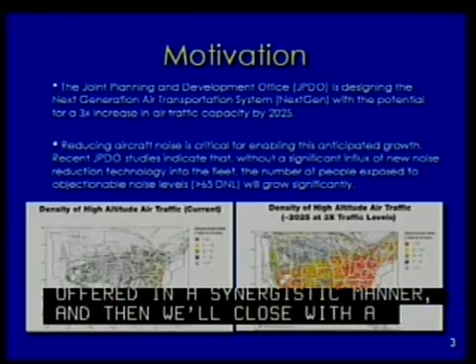In the way of motivation, as you well know, JPDO is charged with designing the next generation air transportation system, NextGen, and one of its goals is the potential to increase the capacity of air traffic by threefold. Clearly, an important enabling technology for that is reducing aircraft noise to enable this growth. Without it, JPDO studies indicate that the number of people exposed to objectionable noise in and around airports will steadily increase. The graphic is just a visual representation of aerial traffic density. On the left is the current picture, on the right is if we have the 3 times growth. All of these planes in the air must take off from an airport near you and land at an airport near you.

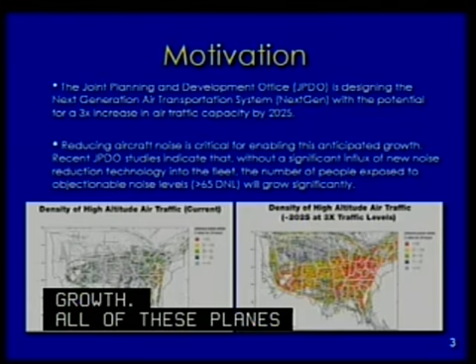So you see that noise is going to be a critical issue. Before going on, because we'll often be talking about noise levels in dBs, we thought it might be important to discuss what we mean.

Because there is some subjectivity in noise, very well-defined metrics have been identified and enforced that define the effect of the noise on the community. They take into account the spectral content, the annoyance rating, duration, and this aggregate metric is called EPNDB, Effective Perceived Noise Level, dB. For the purposes of community noise regulation, there are well-defined so-called certification points that any commercial aircraft flying must meet in order to be certified.

And these are so-called approach for landing, takeoff/cutback, and sideline. There are precise trajectories, distances, and durations for these that every aircraft must follow, and the noise is measured, expressed in dB. The chart in the bottom, concentrate on the blue bars. Those are really representations of what would be measured at each of the 3 points: approach, cutback, and sideline.

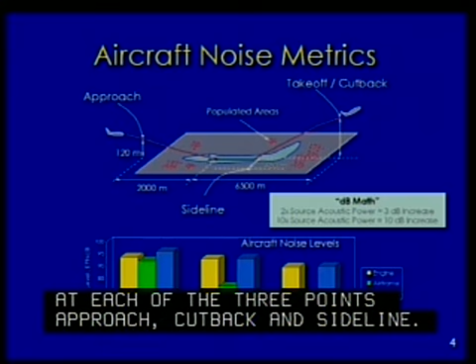In the subsequent charts, we'll often talk about cumulative margins, or margins more specifically. What we mean by that is for every class of aircraft, there are FAA rules, actually ICAO rules, International Civil Aviation Organization rules, that set limits on the noise that a given aircraft can make. The margins are what the measured level of that particular aircraft is at each cert point, subtracted from the noise regulation level.

Generally you want to be below that, so that's typically a positive number. And then you do that for all 3 certification points. You can express that as a cumulative metric - often that's what is done. But sometimes for the purposes of identifying trends, you could also look at an average. And both the sum and the average are straightforward arithmetic sums of the dB levels.

An important thing to remember about dB is that it's a logarithmic scale, which means if you double the acoustic power, double the number of engines, the noise will go up by 3 dB. If you want it to go up by 10 dB, you need 10 times the power. So clearly, to make dramatic changes, you need to do a lot, and the reverse is true also - to reduce significantly the noise, you need to do a lot of work.

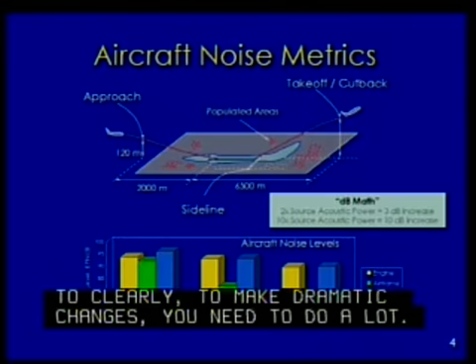Clearly, significant progress has been made over the years, and airplanes are much quieter than 20 years ago. But also it's clear that the trend is leveling off. And why is that?

One main problem is that it is a very complicated problem. Individual sources are highly complicated, involving interactions of flow with every part of the aircraft that makes noise. And then the complicated interactions that the sources could have - the engine slung under the wing, radiating, is affected, the jet plume is affected by the wing downwash. The noise radiated from the engine scatters off of the fuselage, so it is a complicated problem.

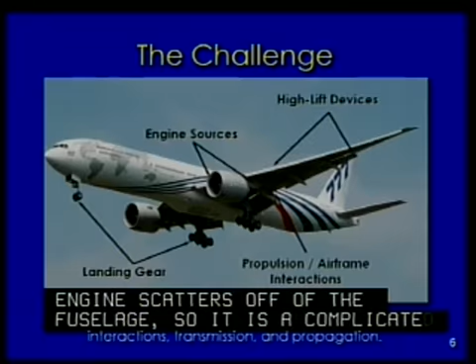And so it's a worthy challenge to rise up to. I think the caption in the bottom really captures it: the aircraft noise is a complex amalgam of sources, integration, interactions, transmission, and propagation.

Against this background of where we are, the challenges we're facing, the Subsonic Fixed Wing project, part of the 4 fundamental aero programs, has set itself goals to enable the JPDO vision. And there are goals in noise, in emissions, and in performance.

And we have identified two generations of aircraft. If today's aircraft are labeled generation N, then N+1 is the next generation, still a tube and wing, would look like a, say, 737, but more advanced. And then the follow-up generation, N+2, is something that would probably be radically different.

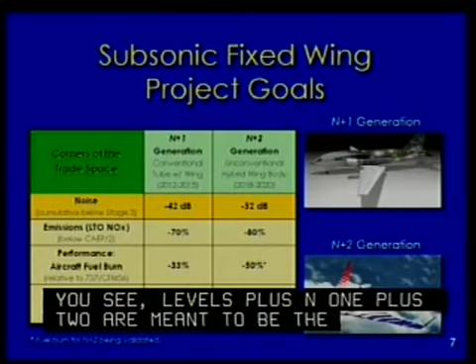I'm not going to talk about all the goals of the Subsonic Fixed Wing project, we'll just concentrate on the noise. The point to make is that the levels, the targets you see, whether for N+1 or N+2, are meant to be the corners of the trade space. If you were to optimize an aircraft just for noise, have acceptable performance elsewhere but really targeted at noise, those are the targets we think are achievable with the technology already in the pipeline and what is over the horizon. These are cumulative margins relative to stage 3.

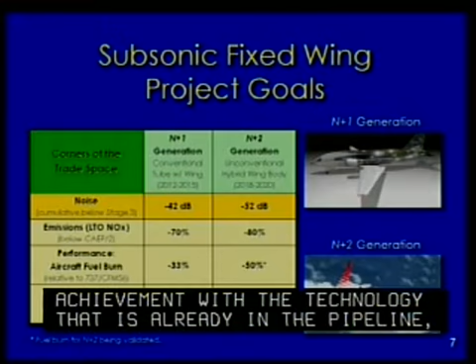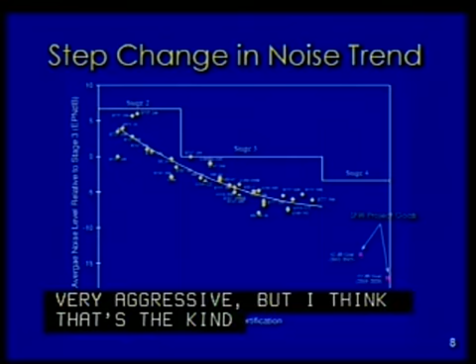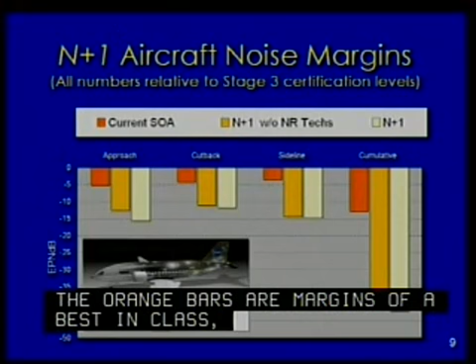A little bit more detail. This is an in-house NASA study. The orange bars are margins of a best-in-class single-aisle aircraft, something like a 737 - in fact, this one is an A320. It shows where it is today relative to stage 3 on a cumulative basis. The light yellow bars all the way to the right are our vision of the replacement for the 737 or A320, bringing the best of the technologies available today or in the pipeline. And you see that it's a significant change.

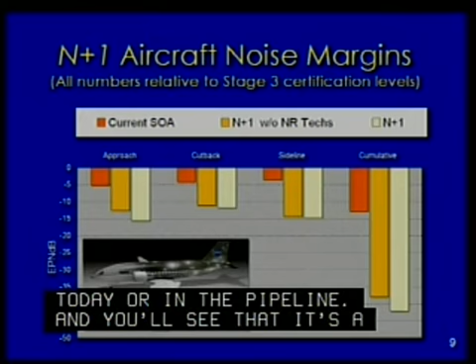Technologies having to do with better airframe design, so-called ultra-high bypass ratio cycle engines, and some additional airframe and engine noise reduction technologies. Together, the so-called N+1 achieves the 42 dB goal. In fact, the goal was set on the basis of this study.

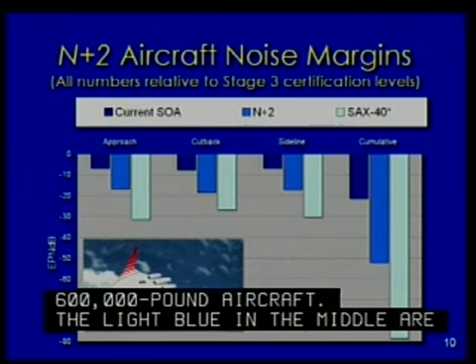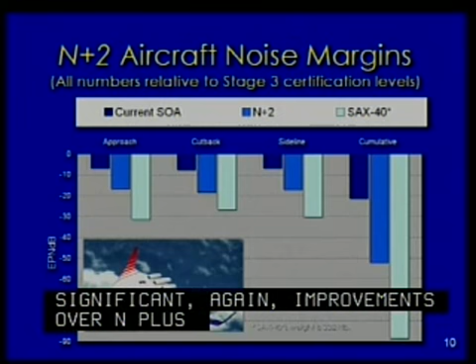Somewhat more nebulous is the N+2 design study. The dark blue, the current state of the art, is a 777, a 600,000-pound aircraft. The light blue in the middle is our vision of a so-called hybrid wing aircraft that would have significant improvements over N+1, cumulatively about 52 dB. We'll talk about the hybrid wing in great detail later, but principally it's the way the propulsion system and airframe are integrated, and the significant shielding you get from that integration buys you the benefits.

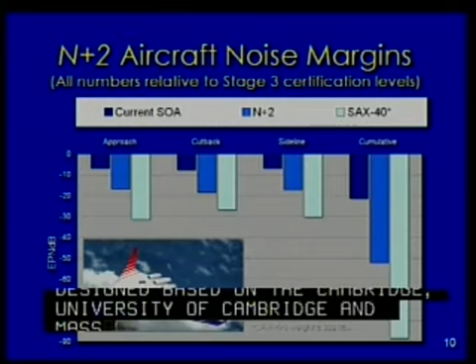For comparison's sake, we've also plotted the SAX-40. That was the design developed based on the University of Cambridge and Massachusetts Institute of Technology's consortium over the course of 3 years - what they called a functionally silent aircraft that would be blending with the background noise. So it was highly optimized for noise, and there were tremendous technical challenges that had to be overcome. They were way down there at about 86 dB cumulative. They had a much longer time horizon than what we are proposing to do, so we are naturally a little bit more conservative, and hence the goal is at 52.

Our research plan is really kind of a common template between all fundamental aero programs, perhaps the entire aeronautics program. It's a layered approach that starts at the basis with the fundamentals, really understanding the physics of the problem and addressing the issues one has, whether it's prediction, mitigation, or diagnostics. Then build technologies and tools at the discipline level, in this case acoustics, that address those needs, and push that up to the next level, integrate with multiple disciplines, and validate primarily the prediction tools we are developing, but also technologies, ultimately leading to a multidisciplinary analysis and optimization. The knowledge and capabilities flow up, the requirements and needs flow down, and ideally this is a continuous loop so things improve constantly.

The research effort is too big for just one entity. In-house, we do what NASA does best - fundamental, leading edge research - but we also work with industry and academic partners to bring in talents and capabilities we may not have in-house. So we have NRA-funded research, primarily with universities but also with some industry, and we also develop partnership opportunities with industry and other government organizations. While NASA in-house research is really at all layers, the NRA-funded research tends to be at the fundamental and discipline level, although it can creep up to the next layer. The cooperative agreements are primarily at the multidisciplinary and system level approaches.

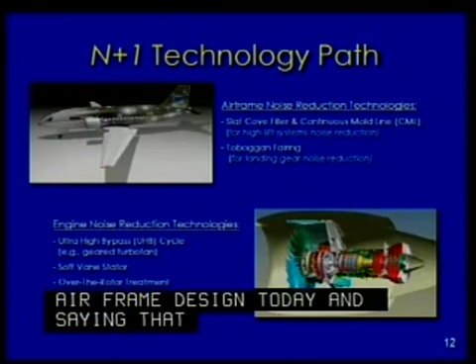Okay, we talked about the goals, 42 dB relative to stage 3. Here's the technology path: basically taking the best airframe design today, probably a 777 with the best high lift system, and scaling that down to the 737 class, assuming you can maintain the noise benefits of that.

Add some technologies, some of which we'll talk about, to further mitigate noise from the high lift system, from the slats, from the flaps, and from the landing gear. Then mate that with a new propulsion cycle—well, not new, but one that has been waiting in the wings, and I think it finally has its time in the spotlight. That's the ultra high bypass engine.

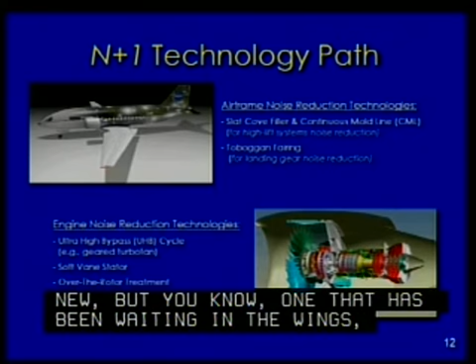Basically, you slow down the fan tip speed. This way, you reduce fan noise. You also reduce jet exhaust velocities, a notoriously difficult problem to mitigate. So you get significant benefits from the cycle alone.

But for insurance purposes, we also add some fan noise reduction technologies, specifically in this case soft vane stators and over-the-rotor. We'll talk about the soft vane stators later. Both of those technologies, in fact, have NASA patents pending on them. So this is our technology path for N+1.

Next slide, please. We have formed partnerships in the past, and we are continuing to develop partnerships now with industry partners who can help us push the front along on these technologies.

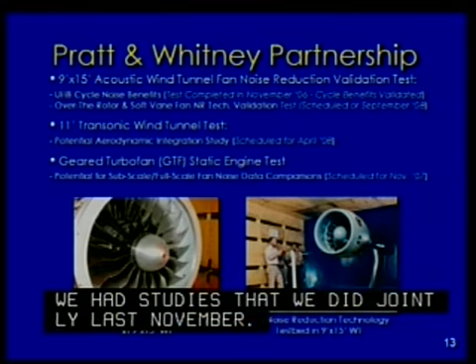Specifically on the propulsion side with the ultra-high bypass, we had studies that we did jointly with Pratt & Whitney. Last November, we tested a scale model cycle of their version of a UHB, which is called the geared turbofan. It was tested at subscale, in fact 22-inch scale, in a wind tunnel, and basically demonstrated the noise reduction benefits of that cycle. We are planning next September to do the test of the over-the-rotor and the soft vane technologies.

That will buy us the extra margin we want to have with the fan noise reduction. There's potential now to work with Pratt & Whitney, still in negotiations with them, to do some integration studies in the wind tunnel. They are also planning, they have on schedule, in fact, to do a ground test of the fan system for the geared turbofan. So there may be an opportunity for us to work with them and compare the scale model noise data with the full scale to see if that connectivity is there the way we think it is.

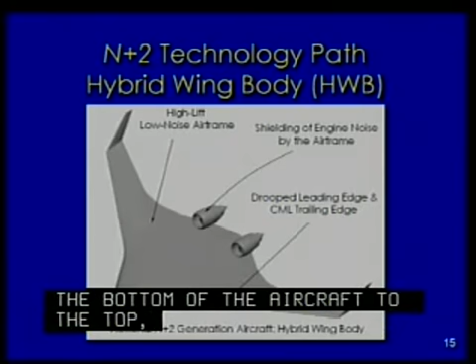Most dramatically, you see the engines can now be moved from the bottom of the aircraft to the top. This introduces the potential for shielding of propulsion noise sources. So clearly, with the engines in the location that they're at now in this graphic, you see the potential for large shielding of the forward radiated propulsion noise sources.

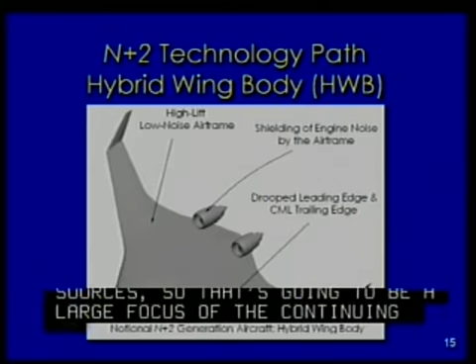It'll be a challenge to obtain shielding of the aft radiated sources, and so that is going to be a large focus of continuing work. It also changes the way the aircraft flies and the way the high lift system is integrated into the aircraft because of the blended wing body shape.

There's that blending of the airframe components as well.

We've just concluded round 2 of the subsonic fixed-wing NRA process, and I'll discuss several of the awards there that are very important in the acoustics area and directly related to this N+2 technology path.

The first award, just completed negotiation and awarded three weeks ago, is led by Boeing Phantom Works. They have MIT and University of California, Irvine as subcontractors. We're beginning to integrate a large team from NASA in the acoustics disciplines, the aerodynamics disciplines, and the system analysis and design optimization discipline as well.

The Boeing team was able to take advantage of that same Cambridge MIT Institute work that was done on the Silent Aircraft Initiative over a period of 3 years, and they'll start with these two aircraft concepts that are shown.

On the left, you see the SAX-40 design with the higher risk, higher payoff technologies that included embedding the engines in the airframe. On the right, you see a lower risk, but still a dramatic step change in technology and noise reduction potential—it's the podded version of this aircraft.

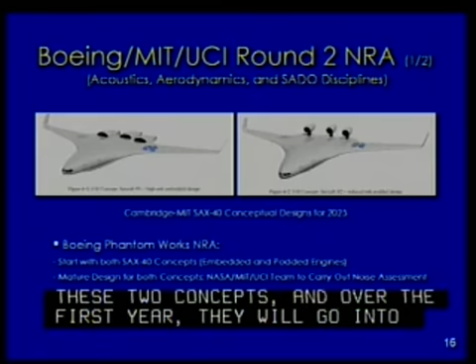The Boeing team will start with these two concepts, and over the first year they will go into much greater detail of the design, closing out the aircraft design in one year. They will look at technology suites to add to these aircraft, and by the end of the first year, working together with NASA, they will plan in year 2 and year 3 a large-scale, high-fidelity wind tunnel test.

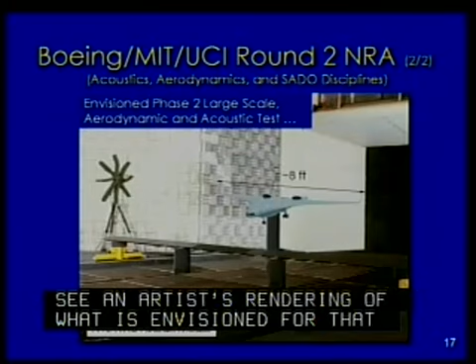If we go to the next chart, we see an artist rendering of what is envisioned for that phase 2 large-scale, high-fidelity wind tunnel test for both aerodynamic and acoustic characteristics of this type of aircraft. We see the 14 by 22 wind tunnel with this concept ready for testing, with far-field microphones deploying the latest phased array technology to image the acoustic sources.

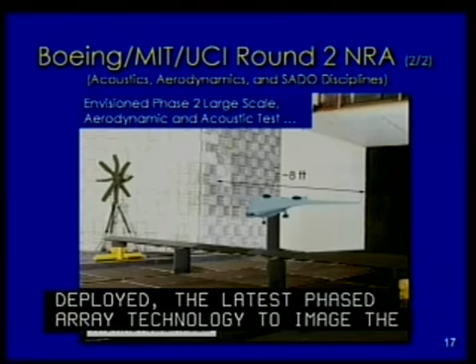This is going to be a big challenge. As we bring the airframe noise sources down and the engine noise sources down, it's going to take a greater resolution of measurement technology to properly characterize these. This is envisioned for phase 2, occurring in 2010 if we proceed to that stage.

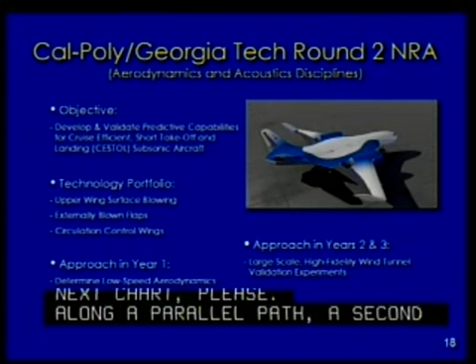Along a parallel path, a second team led by California Polytechnic with Georgia Tech as subcontractors are also proceeding, focusing on that metric listed in the subsonic fixed-wing goals for field length, going after the cruise-efficient, short takeoff and landing subsonic aircraft concept. You see, again, a rendering of that type of concept.

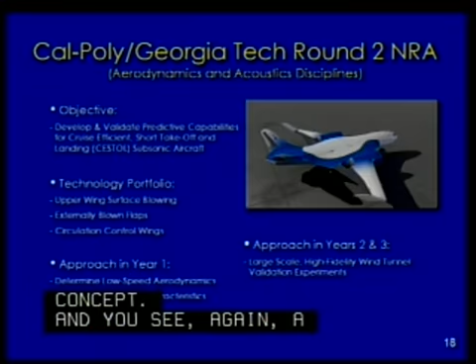They'll look at the technology portfolio, including upper surface blowing, externally blown flaps, and circulation control wings that enable this short field takeoff. In year 1, they'll be putting together the tool set to design and optimize this type of configuration. A key is going to be how they integrate and predict the acoustic characteristics of these technologies integrated into a complete aircraft concept.

Then, like the Boeing-led concept, in year 2 and 3 they'll be putting together plans to do a large-scale, high-fidelity wind tunnel test of this type of concept. In this case, they're aiming towards the National Full-Scale Aerodynamic Complex at the NASA Ames site.

Next chart, please. A different set of concepts were awarded in round 2. Whereas the first two focused on the complete aircraft concept and technology, these are going to focus more on individual technologies which we think are very promising and can really change the way aircraft are designed and flown and impact the acoustic characteristics.

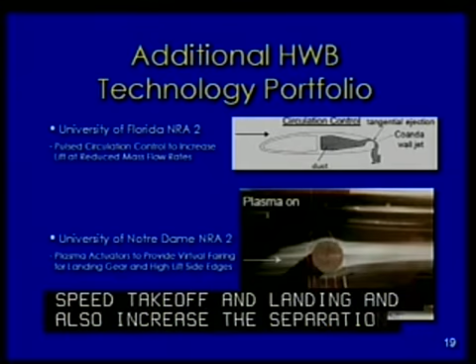The first is at University of Florida, focusing on circulation control. This technology can dramatically increase lift coefficient and therefore enable lower speed takeoff and landing, and also increase the separation between the aircraft and the community below, changing the airframe sources as a result.

In particular, they're going to be looking at pulsed or unsteady circulation control, which can increase the lift while reducing the mass flow requirement through the circulation control jet. They're also going to be developing a very high quality aerodynamic and acoustic data set, which has not been done before—an important step forward in understanding this technology.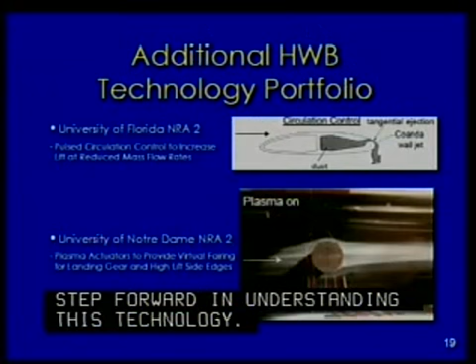The second one will be done by University of Notre Dame, on plasma actuators.

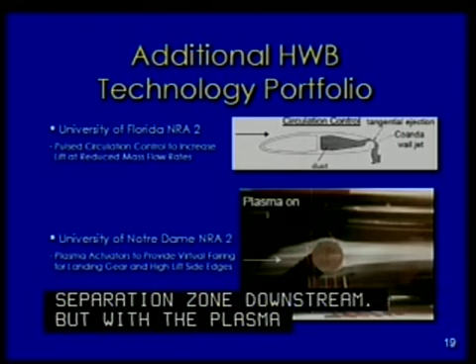You see in the photograph a cylinder in a wind tunnel, with smoke visualizing the flow field, flowing left to right. Normally, flow over a cylinder shows a large separation zone downstream, but with the plasma actuators on, the flow is smooth over the cylinder, and there's no large separation region.

Plasma actuators hold the promise to provide virtual fairings for airframe noise components like the landing gear and flap side edges. It's a very promising technology with multiple applications, and we're looking forward to this work. One of the keys is to push the technology of plasma actuators to higher Reynolds number, more realistic applications.

So we're very excited about those NRAs and the potential for what they can do in the N+2 category. But now I'll hand it back to Dr. Envia for our in-house research.

Thank you, Russ. Russ did a pretty good job of covering some of the partnerships we have formed and some of the key NRAs that address the N+2 technology development. Equally important, of course, is what we do in-house.

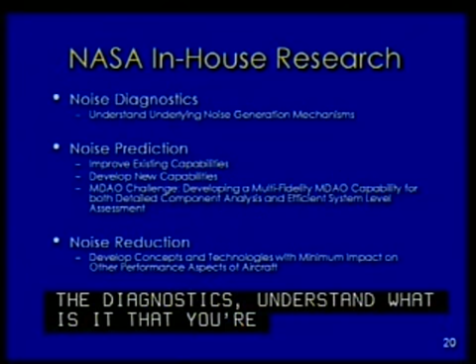It's the kind of work that NASA is uniquely capable and qualified of doing. Our in-house research, as I mentioned earlier, is a formula that has worked well for us in the previous program, so we decided to stick with it, a three-pronged approach to addressing noise research as it relates to aircraft: diagnostics, to understand what it is you're trying to model and mitigate, then bringing to bear noise prediction capability that might exist or that you develop. It's a combination of improving existing capabilities, but also developing new ones as need arises.

The biggest challenge within this framework, the thing that is different in this program, is that we are going all the way past the system level just for noise to an integrated approach to designing the entire aircraft system. So we need to interface with the MDAO, multidisciplinary analysis and optimization. The challenge we've set for ourselves is to develop a capability where you can basically dial in the fidelity that you need.

If you're studying a specific component and can afford the computer resources and time, you can study that in great detail, and we'll show some examples. But you can also turn the dial to something that's perhaps not as high fidelity but is efficient, so you can do a system level analysis and study a number of systems in a reasonable amount of time.

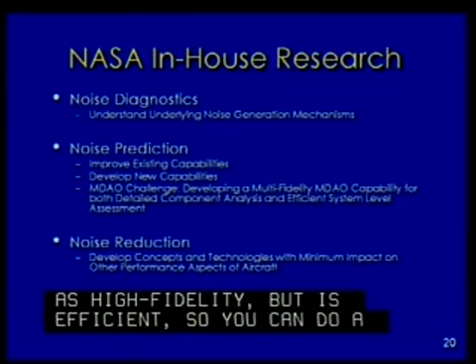Ultimately, the diagnostics and prediction are going to help us devise noise reduction technologies, with the idea that they have minimum impact on the other performance aspects of the aircraft. We've traditionally worked these in a synergistic manner, so there's a give and take and a continuous improvement loop between them.

I'm going to systematically go through and show highlights. Just like the entire presentation, this is only a highlight of what we do, but I think these are things NASA is doing very well, in some cases at the leading edge of that work. I'm going to talk about two diagnostic techniques, particle image velocimetry and acoustic phased arrays, and also a new capability we're developing at NASA to really understand liner physics.

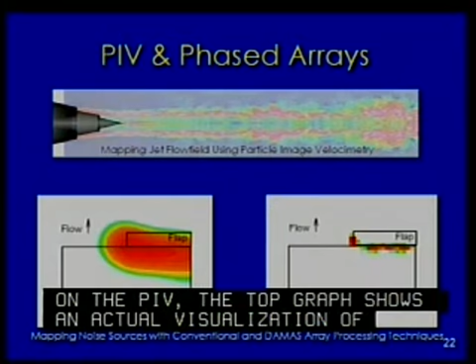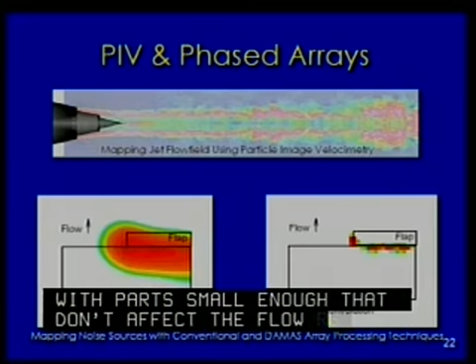On the PIV, particle image velocimetry, and phased arrays, the top graph shows an actual visualization of the turbulence in the jet plume of a co-annular jet. This was a scale model test. By seeding the flow with particles small enough that they don't affect the flow, but large enough to reflect laser light, and then through very complicated image processing, you can develop a snapshot in time of the intricacies of the spatial distribution of a major source of, in this case, jet noise, which is turbulence.

This technique is now pushed into the time domain. There have been recent tests at NASA where you can sequence this in time and trace the evolution of turbulence, which is equally important in jet noise research. We've also attempted to do PIV for turbomachinery behind fans, to understand the evolution of turbulence from the fan rotor as it impinges on the stator. On the bottom is a graphic of another area that NASA is very good at: phased arrays.

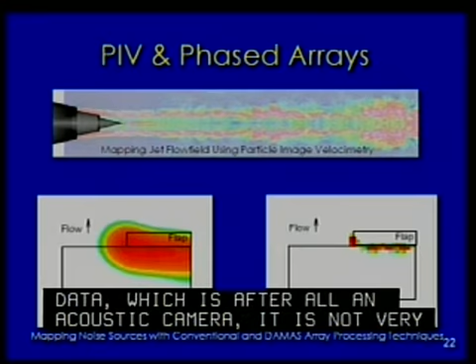What you see on the bottom left is basically a main wing and flap, and the noise source is the discontinuity between the two, the edges that flow gets into, causing vortex shedding and noise production. Using conventional beamforming methods, analyzing phased array data from an acoustic camera, it's not very clear what the primary source is. But a method developed at NASA called DAMAS, a deconvolution method, filters the extra noise out so you can focus on the real source, which is the flap side edges.

Next slide, please. On diagnostics, I'm going to talk about a set of unique capabilities we're developing at NASA to really understand liner physics. With the move toward larger diameter engines, UHBs, the nacelles need to be shorter because of weight considerations. That reduces the real estate you have to apply liner, so understanding liner physics to optimize it and take advantage of the minimized real estate is very important.

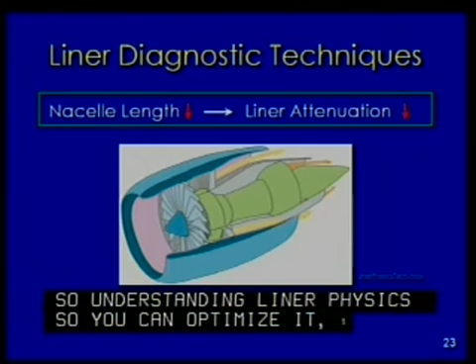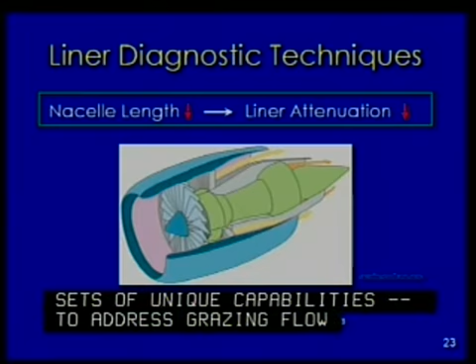What we are doing in this program is developing two sets of unique capabilities to address grazing flow effect on the liner. By that I mean you can measure the liner in static condition and it will have certain performance, certain impedance characteristics. You put flow over it, things change.

And of course there's flow inside the engine, so it's important to understand the effect of grazing flow. We're developing two capabilities that address measuring the performance of a liner subject to grazing flow for realistic flow conditions, realistic frequencies, and essentially realistic scale. One is the so-called grazing flow impedance tube, a facility that allows you, under very controlled environment, to look at the performance of the liner subjected to different boundary layer growth, and waves, acoustic waves from upstream or downstream, and understand what the liner is doing.

What this capability does not afford you is realistic mode content, the modes inside the engine - these are acoustic components from the sources. For that we are developing a different capability, a curved duct test rig, which allows us to go the next step and put more realistic modal structure for the noise. Of course the conditions are not as controlled as the first facility, but together they provide a powerful capability.

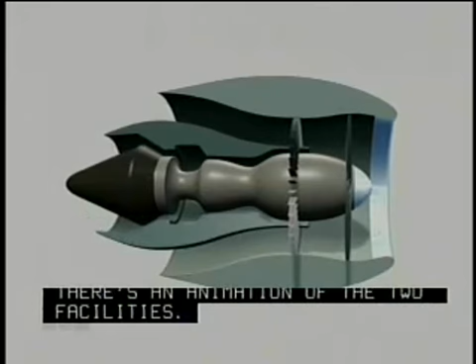First, typically where you would put liners are in the inlet, or in the exhaust duct and the bypass duct.

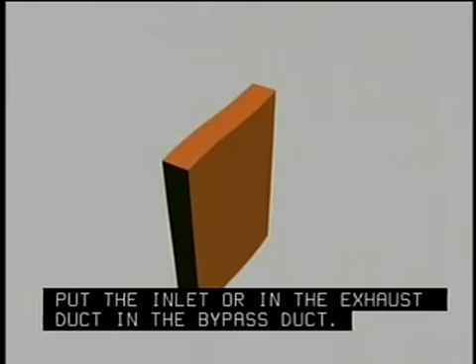So the idea here is it's a graphic representation of taking a thin slice of the real liner, not scaled, and then putting that in the grazing flow impedance tube for testing purposes. The black knobs upstream are speakers - you can dial in the kind of noise feature that you want - and the wires represent leads to the microphones where you make measurements. You can interchange different pieces to control the boundary layer growth.

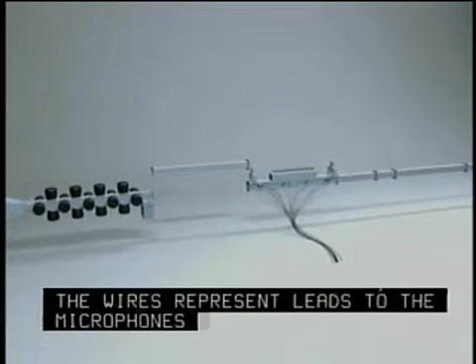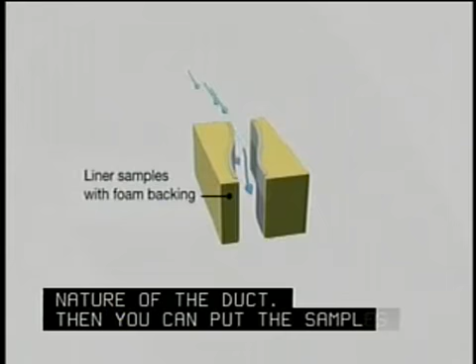That's the grazing flow. The next one, which takes you a step up, is the so-called curved duct test rig. Basically you take a real section of, say, a full scale regional jet duct, just unroll it but maintain in the axial direction the curved nature of the duct. Then you can put samples of the liner with some foam backing in there and make detailed measurements under realistic flow conditions and realistic frequencies. Both of these facilities are essentially unique. My understanding is that you have external customers already lining up to make measurements in those.

Next slide, please. On modeling and prediction, I'll step through only a handful of areas, but I'll sample capabilities that are purely computational, capabilities that are a hybrid between computation and analysis, and capabilities that have to do with basically empiricism. We'll talk about the top two bullets on component prediction, fan and jet, and some airframe noise sources like slat and landing gear. We'll talk about propulsion airframe aeroacoustics, two kinds of interaction, flow interaction and acoustic surface interaction, scattering. And then we'll close with the real challenge, aircraft noise system prediction.

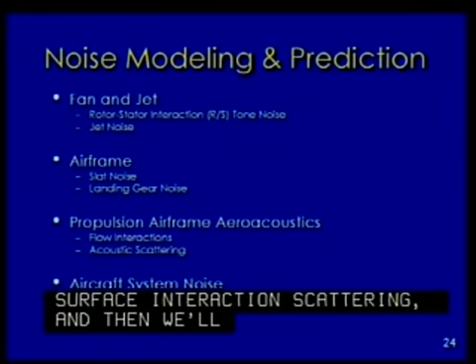We'll walk you through the current capability, Aircraft Noise Prediction Program, ANOPP - you've probably heard that acronym before - and then we'll also introduce the future ANOPP 2, a new framework that allows the variable fidelity capability we talked about earlier. Next slide, please.

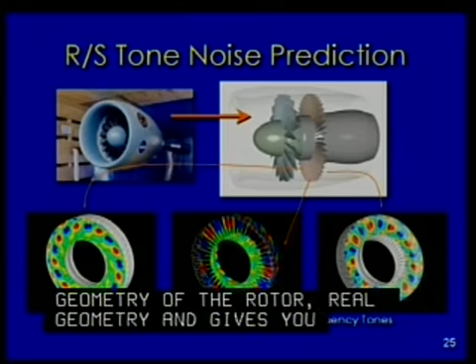On the left is the sound field upstream of the stator, that's the brown blade row. In the middle is the unsteady pressure distribution on the hub, tip, and blade, and downstream is the wave propagating downstream. If this was animated, these patterns would be rotating and corkscrewing forward or aft. These are the so-called modes we talked about earlier.

Jet noise prediction is a much more difficult problem, directly tied to turbulence. The methods that use direct calculation like DNS or LES are limited in Reynolds number, and they're not really practical for the Reynolds numbers of interest.

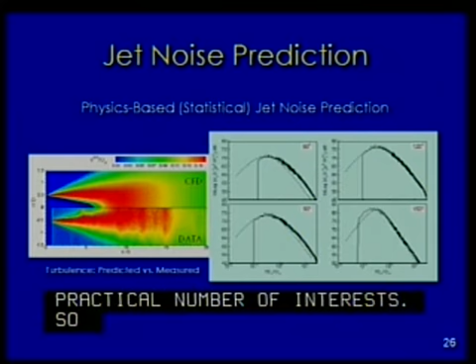So really the king of the hill today still continues to be these hybrid methods predicated on the so-called acoustic analogy. You basically do a computation using CFD, like you see on the left, and capture the source of noise, namely turbulence, the distribution of turbulence kinetic energy, integral length scales, and so on, and then use that as input to a very rigorous analytical model of the noise that solves for the noise radiation given these sources.

What you see on top is a CFD prediction for turbulence in a jet plume, and the bottom is the data. Obviously improvements need to be made, and they continue to be made.

On the right is the prediction. It's a bit difficult to see, but the idea is that the predictions are pretty close to the measurement. The angles are measured from the axis of the jet: 180 degrees is downstream in the jet plume, 0 degrees is upstream. So you don't really expect a very good comparison upstream, because there's shielding from the nozzle and other effects we're not modeling here. But downstream, certainly where we think this should work, it does work.

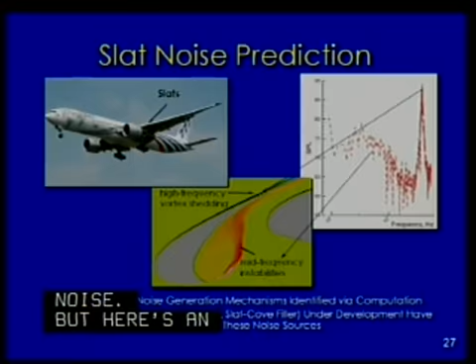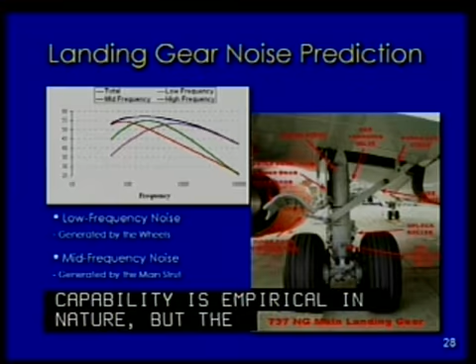So there are different components built to account for, say, the wheels, the main strut, and the smaller parts of the landing gear. The prediction capability is empirical in nature, but the input that drives the empirical coefficients comes from CFD. So this is an example of marrying CFD with an empirical method.

Next slide. I'll now hand back to my colleague, Dr. Thomas, to cover some exciting features that we're working on.

So you've seen some snapshots of individual components being studied and prediction methods being developed. One area we've worked on for several years is looking at the interactions between components, because as you can see in the photograph, when you integrate airframe and propulsion, that creates complexities and interactions that occur.

This is a flow interaction type, where you see the exhaust flow being affected by the presence of the pylon structure that connects it to the wing, and later by the wing downwash and flap downwash. We started several years ago with this approach of studying basic jet-pylon interaction and developing noise prediction tools for it. To do the statistical type of noise prediction development that Ed referred to, the RANS-based CFD methods, you have to, of course, compute the flow field accurately.

The first chart in the circuit is a split screen. On the left, you see total temperature being measured in a laboratory experiment without a pylon—just a round jet. On the right is the best off-the-shelf aerodynamic CFD prediction tool. You can clearly see the difference between measurement and prediction; the flow field prediction is off considerably.

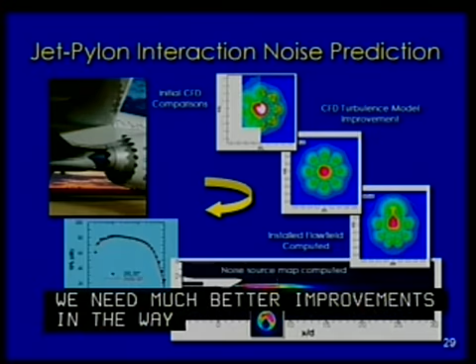But we continue with the best methods to study the interactions and learn what we can, and develop noise reduction concepts from the best understanding that we have.

So we go on in the third chart to study the interactions. Now you see the pylon, its presence making an even more non-symmetric flow field. Then using the statistical-based prediction method called Jet3D, you see in the noise source map that's computed from that jet pylon interaction—very visually—the computed noise sources are very non-symmetric. That's, again, this basic interaction between the jet and the pylon.

Then we complete the circuit by comparing with model scale data, and that comparison looks very good. That whole circuit is a very fruitful interaction between experiment and prediction capability, but it's also intensive—it takes about 2 years to go through that circuit the first time.

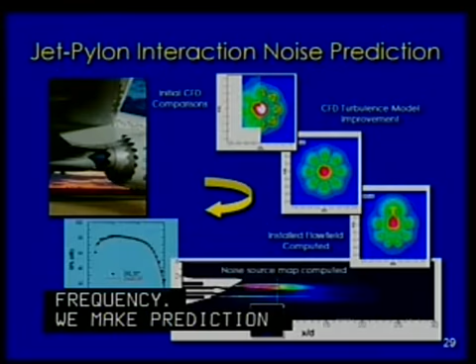Now we move on to making improvements in the noise prediction method so they can handle a greater range of directivity and frequency. We make prediction improvements in the basic flow field measurement as well. Then downstream, we look at making use of unsteady methods to improve certain regions of the flow field. So this is, again, a snapshot of 2 years that we will build on in the future.

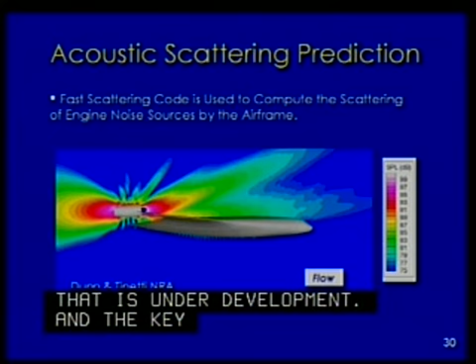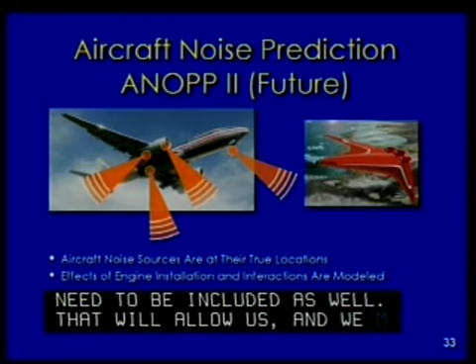Again, the ANOPP paradigm was based on the conventional configuration and was developed to be quite good at that configuration, but it's largely for evolutionary changes of that configuration. To break out of that paradigm needs a new aircraft system noise prediction method, ANOPP2.

Now we'll go into a little more detail in the next chart as to this paradigm shift. In the top half, you see the familiar pyramid. And at the wide base there, you have the foundational physics and modeling that we've given some highlights on when we look at the individual sources.

ANOPP then resides in the green bar there, the discipline level capability. That's where these components are rolled up together into an aircraft system noise prediction method, which can then feed into the MDAO and the system design goals at the top of the pyramid.

The bottom half, though, starts to address the magnitude of this change from ANOPP to ANOPP2. For system design, MDAO capabilities, you need a wide scope. You need to address a wide range of noise reduction technologies, configurations, operations, etc.

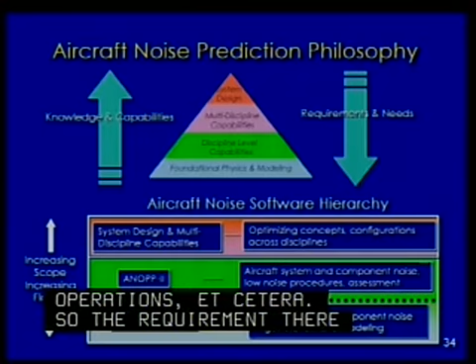So the requirement there is for rapid types of calculations. You can't run high-fidelity CFD codes for weeks and weeks. But if we're going to address these types of requirements, we need the high-fidelity codes or the products of those high-fidelity codes, which are at the bottom, the research codes.

These are of increasing fidelity. And so ANOPP2 is going to have the very tough job and challenge of being that middle, in transferring that knowledge and that high-fidelity prediction capability into a usable tool for system noise design.

Next chart elaborates more on the magnitude of this challenge. On the bottom there, the half is that wide base, all right, the foundational capability. These are most, not all, of our high-fidelity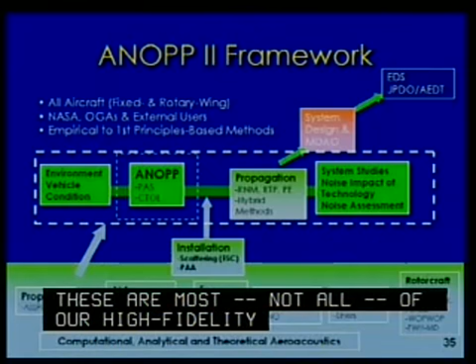research codes that have been under development sometimes for many years by teams of researchers, or are new codes that are in the process of being developed. These codes, again, are typically research codes, high fidelity, large computational resources. You see there in the middle, beginning that bridge, the installation effects that are being addressed by sets of codes.

In the middle there, around the porous boundary, the dashed boundary, is the framework for ANOPP2. All of these high-fidelity codes are going to be linked into that ANOPP2 framework. They're going to have to be accessible, usable to that ANOPP2 framework.

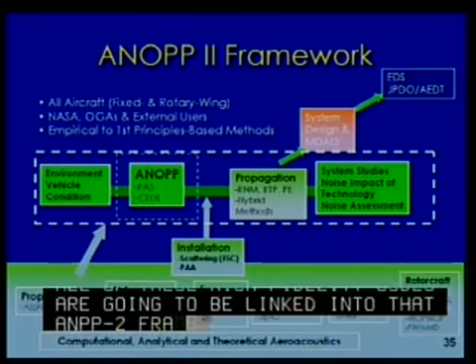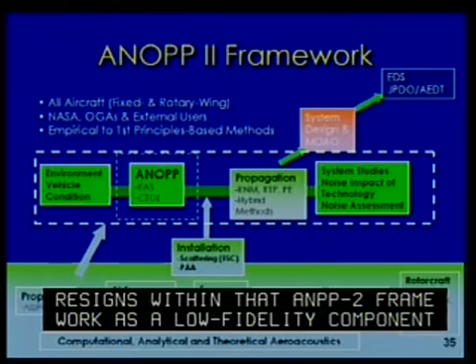ANOPP, the old ANOPP, still resides within that ANOPP2 framework as a low-fidelity component of ANOPP2. But the installation effects will be added, the improved propagation tools will have to be added to work in this framework. But it's going to be a real challenge to do this.

And again, to provide a usable tool to system design and MDAO requirements and then on up to FDS requirements. So this is going to be a great challenge. Next chart, please.

We want to give a picture of the capability of ANOPP as it exists today with some of these improvements that have begun to be integrated into it. So we'll watch a simulation here. This is a demonstration of ANOPP.

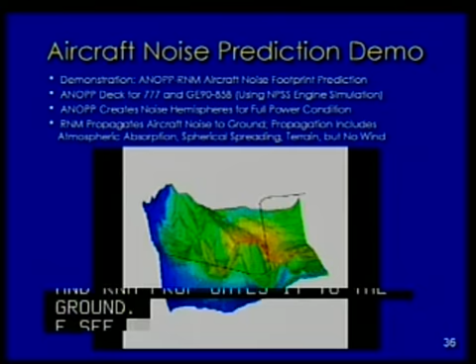Combined with a propagation tool, it's a simulation of a 777 with a GE90 flying over terrain from the U.S. Geological Survey, which you can download. ANOPP creates the noise hemisphere, and then RNM propagates it to the ground. You see the high noise levels in red, lower levels in blue, as the aircraft flies along this track, descending into the canyon and then gaining altitude and flying out. The aircraft is just represented by a dot for the purposes of this simulation.

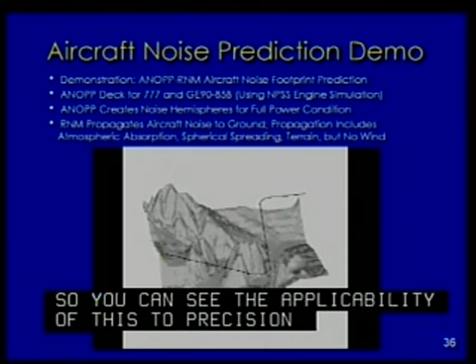So you can see the applicability of this to precision flying, precise studies of noise as aircraft approach or depart from airports, or other applications of community noise interest. Next chart, please.

Now we move on to the third in the triumvirate of research: noise reduction technologies. We'll highlight a couple of key technologies, by no means all of them. In the engine area, we'll look at the soft vane stator. Under the category of propulsion-airframe aeroacoustic interaction, we'll look at the PAA chevrons. And in airframe, we'll look at two noise reduction concepts: the continuous mold line and the landing gear fairings. Next chart, please.

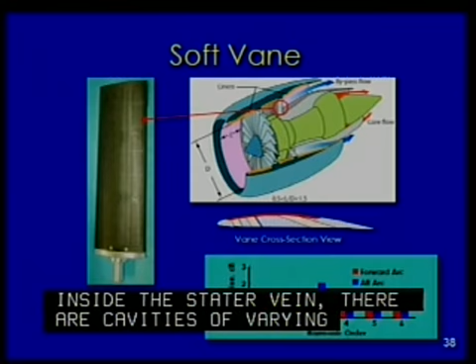The soft stator vane addresses the rotor-stator interaction which Ed addressed earlier. It goes on the stator vane in the bypass duct. In the photograph to the left, you see it has a perforated surface, or soft pressure release surface, on the upper surface—this is the cross-section of the stator vane. Inside there are cavities of varying depth, which give it a frequency dependence, while the bottom pressure surface is solid.

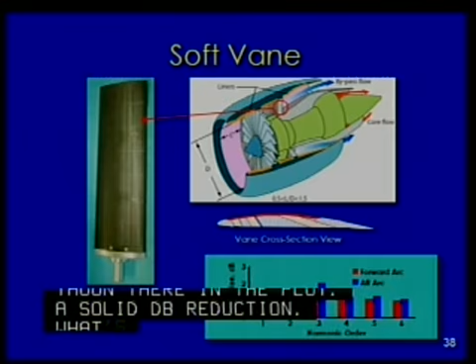This has been developed over a couple of years and tested in the 4-foot low-speed fan facility. A typical set of results is shown in the plot: a solid 1 to 2 dB reduction. What's very promising is that while it was designed for tonal reduction at the source, it also shows broadband noise reduction. And while it was intended to reduce aft-radiated sources, it also reduces the sources radiated out the inlet, the forward arc. So this is a very promising technology.

The next step is to move this to more realistic, higher speed fan applications, which can be done in the 9x15 test of a UHB concept. Next chart, please—the PAA integrated chevrons.

This is a large story covering one of our recent partnerships. It started in 2003, a partnership between Boeing, NASA, General Electric, Goodrich, and the FAA, who provided critical funding to the whole project.

This part of the partnership addressed the idea of integration effects, and how we could take a technology like chevrons—which had been under development for many years—and make it better, getting more noise reduction by understanding the integration effects between jet and pylon. We did a lot of exploration work, using the best prediction methods we could bring to bear. You see an example studying that asymmetry created by the interaction of the jet and the pylon. We then went to working technically with Boeing.

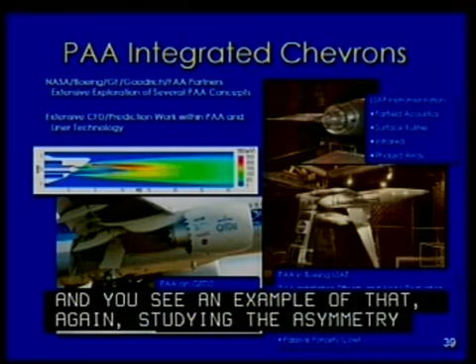We went to their low-speed aeroacoustics facility, where we can do this type of system testing with the fuselage, the wing, the high-lift system, and the jet exhaust together. It's a very promising testing approach, necessary for understanding these interaction effects.

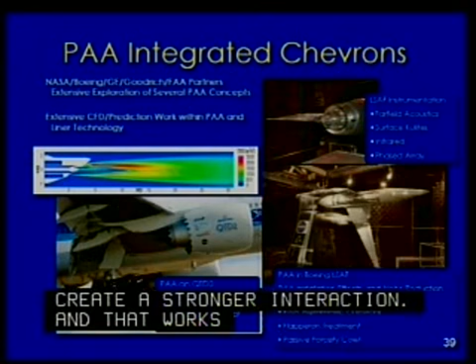We studied a range of technologies, including a family of chevron nozzles we hypothesized would improve acoustic performance based on a favorable interaction between jet and pylon. Flying in 2005, the best of those nozzles was the T-nozzle, where chevrons closer to the pylon have a stronger effect on the flow field—they're longer, have more immersion, create a stronger interaction, and work favorably with the pylon, clearly superior to the uniform circumferential chevrons.

Now you'll see a theme which is very important: in this case, it's not just about the chevrons, but about what we gain from system testing—subsystem and system level testing, where we're testing complete models: fuselage, wing, flap system, and propulsion source. You'll see that in the NRAs we talked about earlier. We're headed towards higher fidelity, large-scale, integrated testing, where we can address the major interactions and sources and achieve better understanding. That relates again to the system level prediction methods, ANOPP and ANOPP2.

This type of trend is going to be very important. It's also very difficult—doing these types of tests is a great challenge, both from a complexity point of view, an instrumentation point of view, and a test configuration point of view. Next chart, please.

Airframe noise reduction, continuous mold line link. Here we see a large-scale test in the 14 by 22 of a more realistic wing. This is a swept wing.

It has a slat with a slat cove filler noise reduction concept, and you can see there the flap has been deflected, but it now has the continuous mold line link, eliminating those sharp edges. Now this was a fixed concept, it didn't actually actuate. It was meant to quantify the noise reduction potential of these sources.

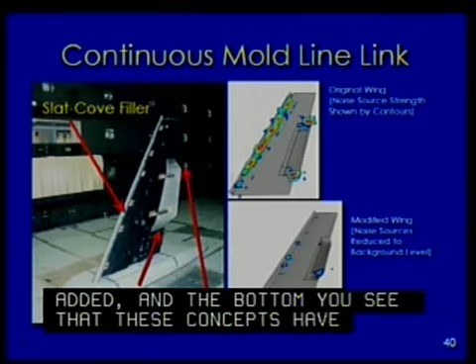On the right, you see the phased array imaging of these sources. On top, you see the original wing without the noise reduction added, and on the bottom, you see that these concepts have proven their potential at reducing those sources by several decibels. This is, again, one step further in the process of developing these concepts, developing the understanding, and then moving on to more realistic prediction and noise reduction applications.

Next chart, please. Landing gear noise reduction. While one team working with Boeing was working on the chevrons, another part of the NASA team, the airframe noise team, was working with Goodrich and Boeing on the landing gear concepts for this flight test. Again, this occurred in 2005, and it was a set of tests at both subscale as well as this full-scale flight application.

We've talked about the landing gear and the complexity of the landing gear, the multiple bluff body shedding sources of the landing gear. This was an attempt at a partial fairing of the landing gear, again that balance between application realism and the desire to maybe fair the entire landing gear. And together with the subscale test, it showed good promise.

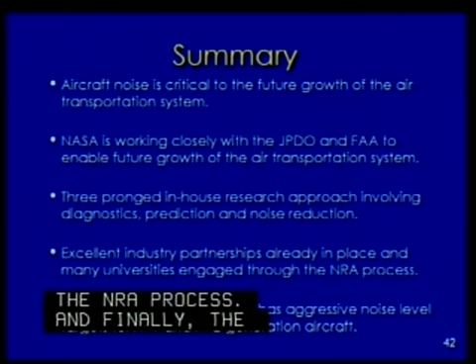We have a very effective three-pronged research approach involving diagnostics, prediction, and noise reduction. In that approach, and specifically in partnerships, we continue to enjoy and benefit from excellent industry partnerships and engage a number of universities through the NRA process. And finally, the subsonic fixed-wing project has moved out with aggressive noise level targets for both the N+1 generation and the N+2 generation of aircraft.

Finally, I'd like to say on behalf of the acoustics discipline, my co-speaker here, Dr. Envia, thank you very much for your attention, and we'd be happy to entertain questions.

George Price from the JPDO: Have you rolled up all the things you're doing to see, when you started, you put up some goals. If I remember, it's minus 32 and minus 42 dB. If you take all the things you're doing, have you rolled up projections of that to see how you do against those goals?

I'll answer that question. The goals that were set were based on internal studies saying, if you use these technologies, this is what you're going to get. So the goals followed from the study, not the other way around. The challenge is to demonstrate and mature those technologies and validate that they would actually achieve those targets. And if I could add, those were based on the studies at the time. We'll continue to improve those studies as we get new information.

Have you looked at the effects of blade mistuning, either natural or intentional, to reduce noise from engine sources like fan blades or stator blades? It will help if that's the primary source. You can mistune tonal sources more easily than broadband ones. If you have a dominant tonal noise, that's certainly one approach. Another approach may be active noise control if you're going after a specific frequency. But to answer your question directly, no, we have not specifically looked at that particular idea.